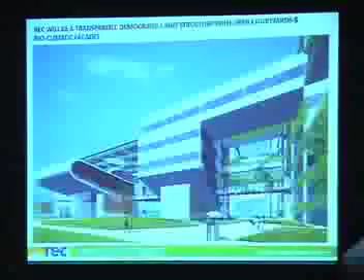It is very open compared to our headquarters. If you look into the Lutyens' zone, you will see a totally different type of building. So if you compare, to us, the democratic system, it is very open, it's transparent, it is light - it could be glass, it could be stone, as long as the transparency is there.

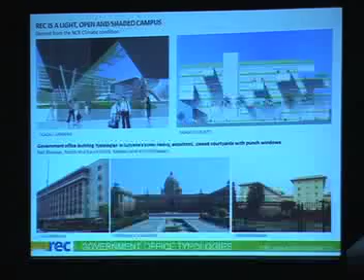Not necessarily glass buildings are bad or they are unsustainable. There's a way to do them. And I think next we could also show you how we can do it on that part. So we just had a comparison of what can be achieved without sacrificing our culture here in India.

The issue comes with, oh, glass is a Western product. No, it just looks like that. My answer was, in our presentation, that yes, we tried to make a glass which should look like silk or khadi. How could we make a glass? We have been asking our glass producers here, what can we do with glass, so it should look like silk. It is a transparent material, it protects, it breathes, but it's a process which is going on, and we're going to share how we're achieving it.

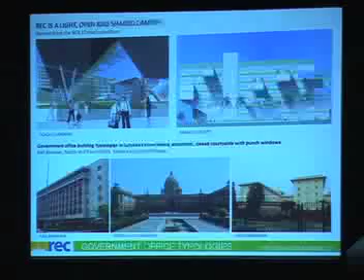So we compared with our post-independence headquarter buildings, you see in Mandi House and around this area - very solid, very tall buildings, with courtyards, very close courtyards.

Then we looked very quickly at what are our sustainable strategies for this particular project, how we go about it. We're all aware - you are architects, engineers, you know all these issues - but I'm going to be pretty quick. We want to have an open forum.

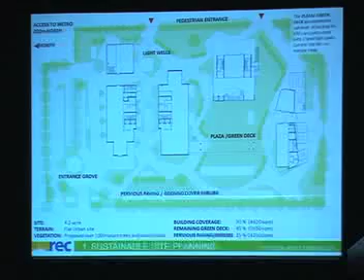Basically, we just have a strategy which is, we're all aware, like passive design, orientation, sun studies, wind studies. So we did all these things, and this is how. We've taken a very typical courtyard. We made maximum exposure to the north and how these courtyards are open.

Now, same courtyards - instead of just today, with the structural systems, technologies we have, materials we have, knowledge we have, with all seismic issues, we can do things which will hold together, which will work, and give us a beautiful response to NCR's very complex dust, sun, and winter conditions.

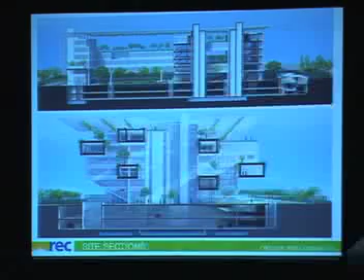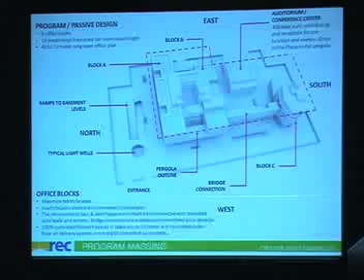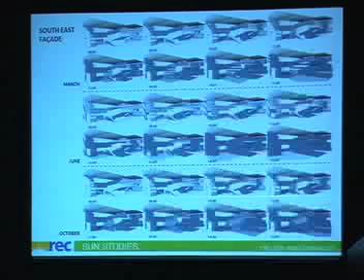Then we studied the whole options. The building is basically, on the passive side, pretty clear. We all know north facing and east. Only thing we tried to do in this project, which was more unique, was we did extensive studies of climate with the help of TERI, because we could really model everything and come to understand, not have a preconceived shape. These shapes are evolved basically out of necessity and studying the sun and responding to those conditions.

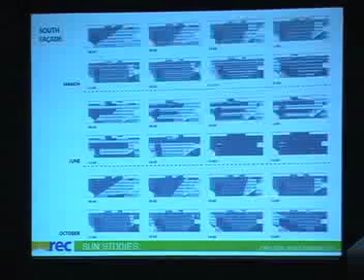These are various south facade studies where we can see when to protect. During the summer months, the building is in complete shade. If the building is in complete shade, we have a lot more options. This exactly shows March, June - what happens in the morning, what happens in the afternoon, how the buildings get shaded in the June months.

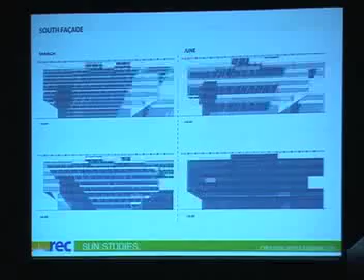Then another interesting thing we did with the computer modeling was we took the wind studies, which is the most unpredictable.

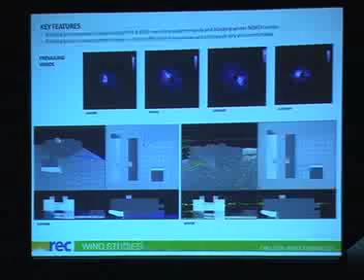When we're studying the wind studies, we discover that if we lift our buildings up, it invites the breeze in. As the wind comes in with the narrow courtyards, we're creating a venturi effect, so the hot air is exhausting and the whole movement is happening. Now, these are modeling, these are studies, and we are looking into the next level of it.

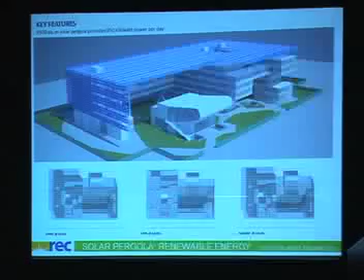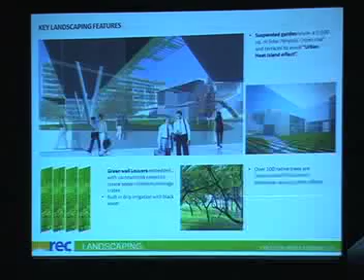We have key landscaping features which we are going with. Below the solar pergola, we basically have a suspended garden which cools the whole environment. We have green wall louvers in this project and other standard proven technologies. Also, the two blocks are connected with bridges, and these bridges become your social interactive spaces you could go in and out of. It gives you green gardens and cools the whole building.

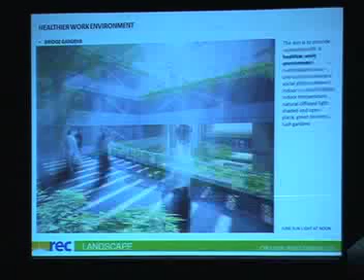The most critical issue today we are facing is we cannot ignore technology. Technology is changing. As India, like any other country, we have to catch up at the global level with what's going on, and then find our own local solutions.

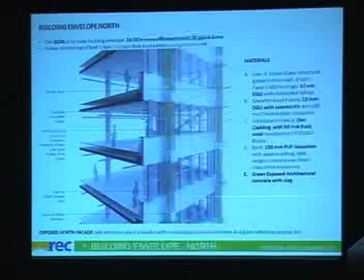So we looked at the building envelope, the mechanical systems, indoor air quality, water, and electrical. In the building envelope, we have a well-insulated building, better than ECBC guidelines of the requirement with U values - we are trying to make it another 20% better. With those guidelines and set rules, we are getting much better performance of the whole entire building. We will share this on our website, as we build it, where we're benefiting and what the issues are.

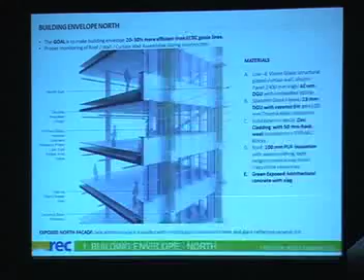Each facade, whether it's a north facade, responds to the north - it's a direct response to the conditions on the north. I'm just trying to move fast and give you the basic principles of how this building is designed. On the southeast, we have embedded louvers.

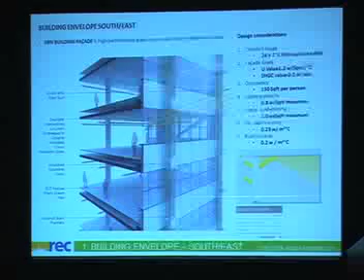We have a thicker glass, about 42mm. We're getting much better U values, and we are using embedded louvers. These louvers, at the vision light, give you a lot of clarity - you're getting a very good VLT. Above that, it becomes a glass shelf, which brings light in. Our entire structure is made out of exposed white concrete with slag, a blast furnace steel usable material - we are reusing it.

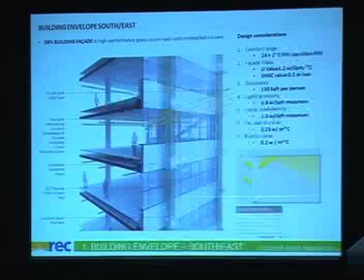Our west side is basically completely solid, with some screens and stuff. And then we're using electrochromic glass in public areas, which with the sun gets dark and light, and we could turn it as required.

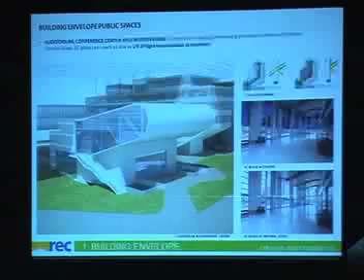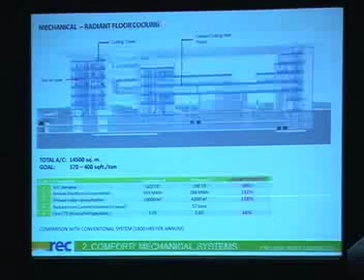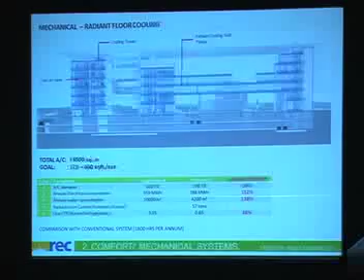This building, as an office building, needs more flexibility with all the electrical and wiring, so we have a raised floor, and we're using basically a radiant cooling system. The whole slab has embedded pipes - it cools the slab, and your whole cooling system is controlled by that. This diagram will show you exactly how the cooling works.

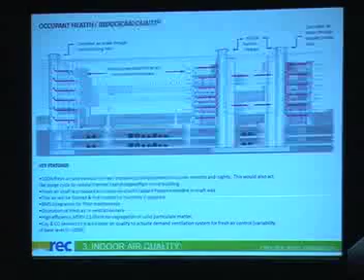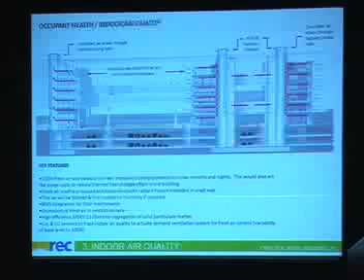Indoor air quality is also very critical, because most air-conditioned buildings don't have any. We are using 100% fresh air. We're trying to get fresh air, which we are cooling again through embedded louvers on the top, and dropping the cool air from there into the whole system.

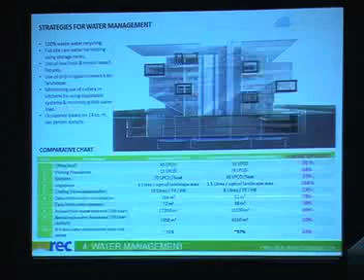Every drop of water, we have 100% use of water - we're re-harvesting every drop. The diagram shows how the water is all collected and recirculated. The same thing on the lighting side - these are all LED. This shows all what we are producing, and basically we're generating per annum 208 megawatts.

And our annual use requirement is 189, so we have about 19 surplus.